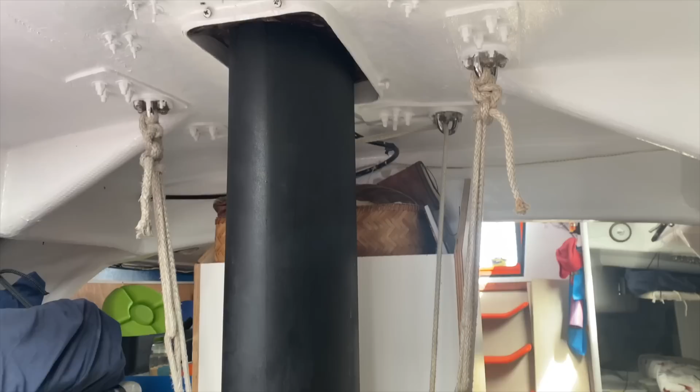Welcome back to Sailing NV, where we're turning an open 60 race boat into a fast family cruiser. In this episode, it's finally time to tune our carbon fibre mast and rig.

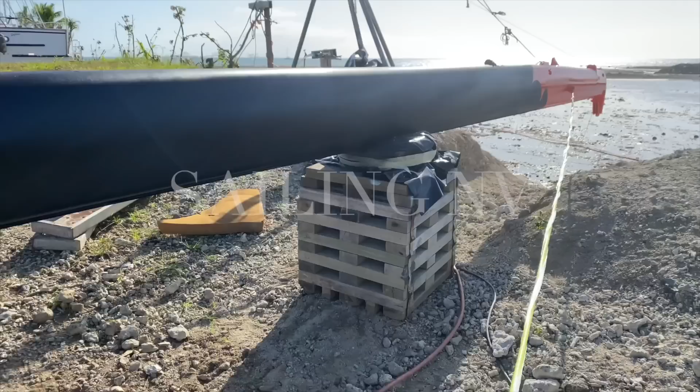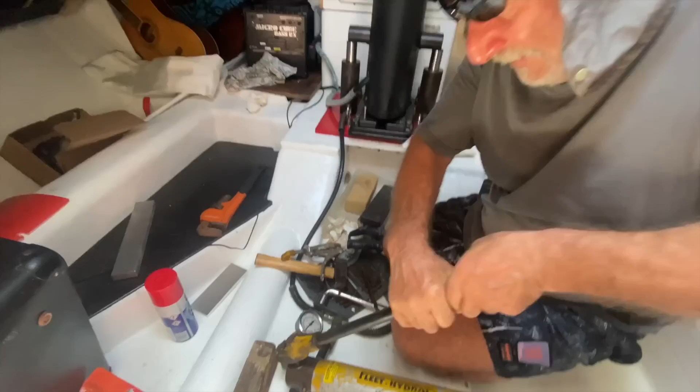Our mast is approximately 26 metres long and made of carbon fibre. It's got 3 spreaders, and the standing rigging consists of 2 cap shrouds and 3 sets of diagonals: D1, D2 and D3.

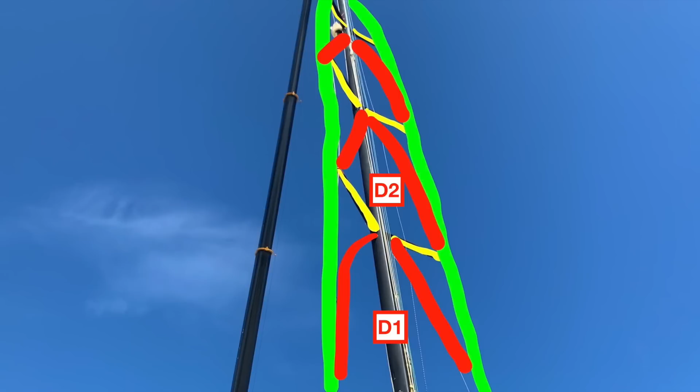Rigging on boats is usually tensioned by hand using turnbuckles, but for boats and rigging over a certain size, this becomes no longer possible, as the force needed produces so much heat that it would cause the turnbuckles to deform. So in this case, a hydraulic jack is used to tension them further.

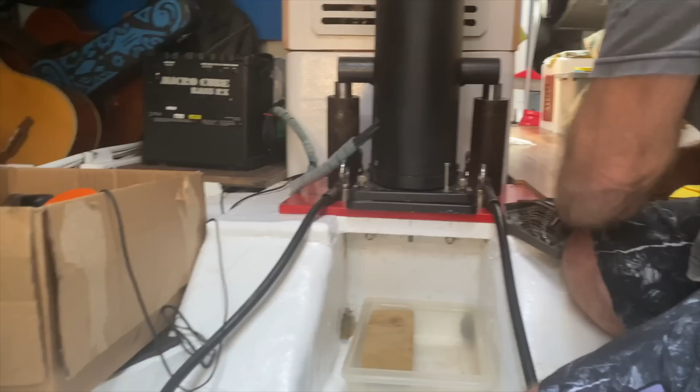Here you can see the pistons from our hydraulic jack positioned underneath a bar that goes through a hole in the bottom of the mast. The pistons of the jack push on this bar to lift up the mast so that wedges, known as shims, can be slid underneath.

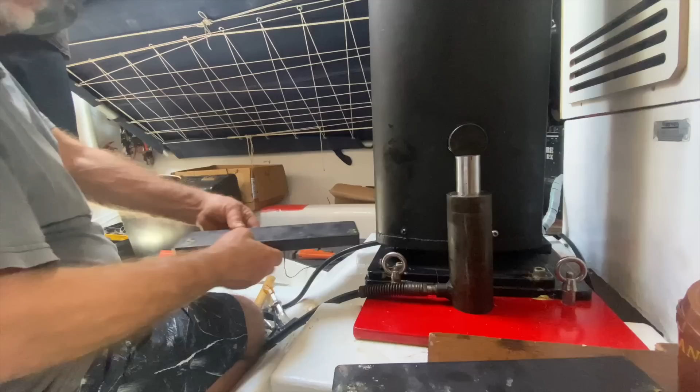So Applied Composite Technologies have been contracted by Sydney guys. We had completed the rig pretty quickly and stepped it already in Sydney on the 10th of March, so pretty much 3 months and 10 days. So 1,500 man-hours went into the rig and stepping.

I was only called once to Sydney to tune that rig, as they were heading for Hamilton Island regatta and then planning to do Hobart. That was on the 15th of July 2011, that is 11 years ago. I went to Sydney to tune it.

She carries about 17 tons of compression in a racing tune. Pete explained that in racing tune, the cap shrouds are tuned to 20% of their breaking strength, which is quite a high tune. My intention is to tune it a little bit lighter, minimum like 15%. Okay, 15%, yeah, which is good standard of industry.

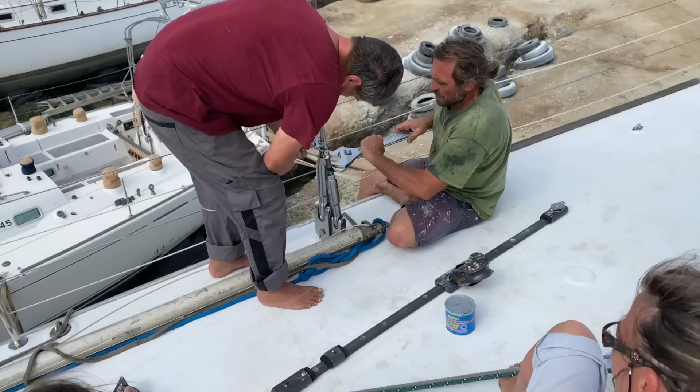When we stepped our rig, we just did the turnbuckles up by hand, as we were waiting for this moment to tune the rig properly. So the first step was to jack up the mast to fit the shims underneath and see what tension this would put the rig under.

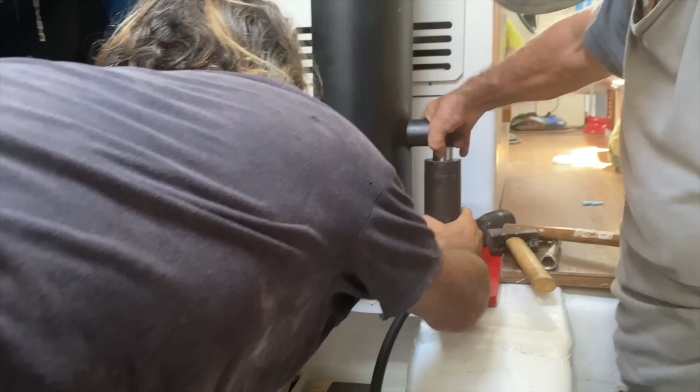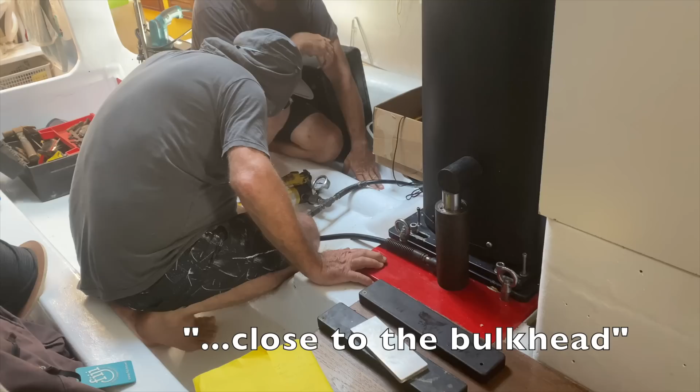Keep the air open. Yeah, here, close to the bulkhead. If you could watch the D1 and D2 lines, so they don't get stuck and damaged. Okay, see, it's going up nicely.

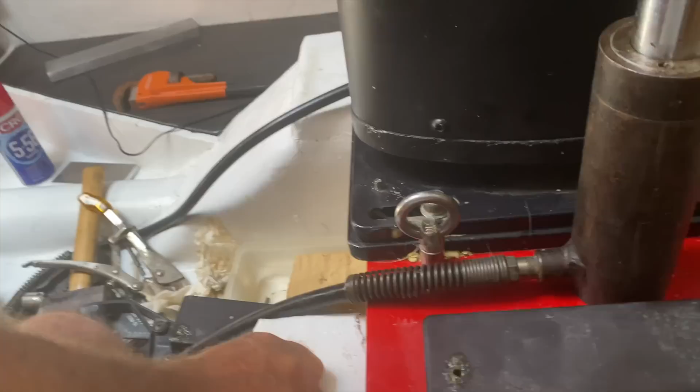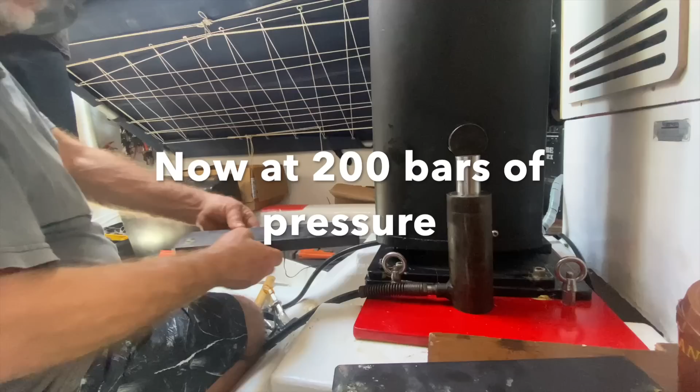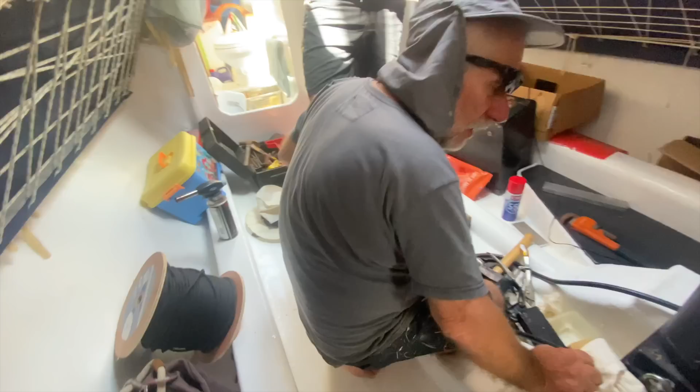Don't stand too close, come in front. Don't stay on the side of the mast, because if anything jumps, you'll be hit.

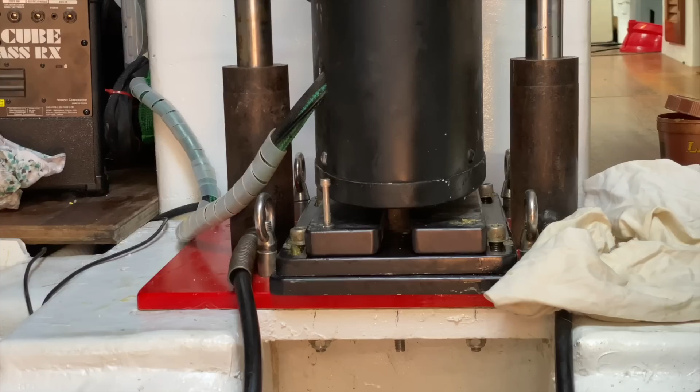240. We want to go to 260.

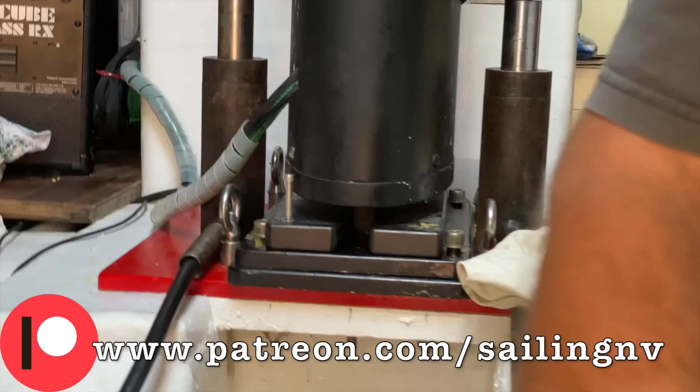Are the D1 lowers tight, or are they still loose? The D1 is still loose. Good, really loose. D2s start tightening up a little bit. Yeah, they take a little bit, but they are very loose. You can see the bend of the rod, and they shake. The D3, they look tight.

It is scary. Yeah, I'm scared. We're scared to break everything. No, we trust in you. I'm scared to be missing something.

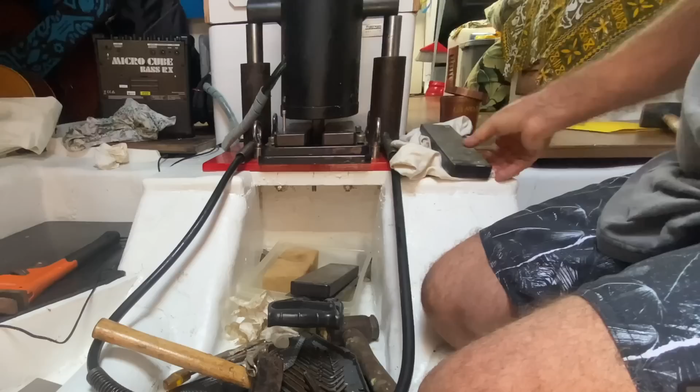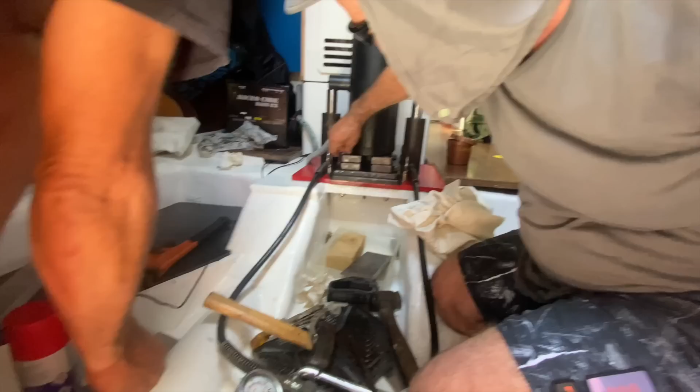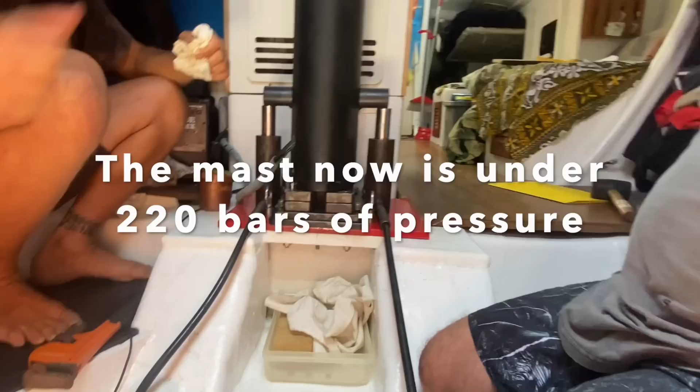To determine the pressure that the mast is under when it's sat on the blocks, we release the pressure on the jack, shaking the blocks until they're no longer loose. At that moment we know the mast is sitting on the blocks and no longer on the pistons of the jack, and that is the pressure the mast is under. 220, this is the tuning pressure at the moment, because that's where the mast sat.

I mean, it's actually a bit less because the keelson is a bit spongy, it's not 100%, a million percent firm. How could you tell? You just felt it, I was able to shake it until I reached 220, couldn't manage, and it set.

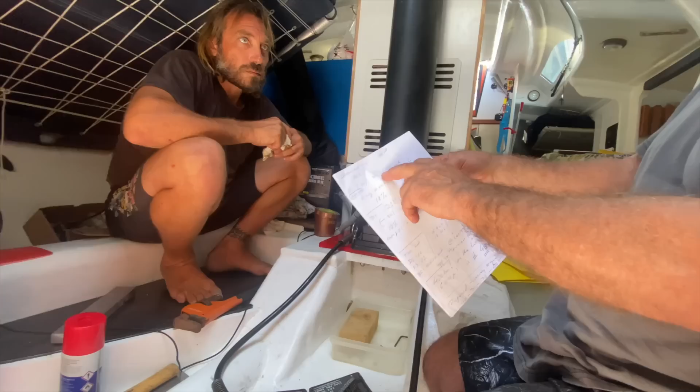Each rod breaks at 27 tons, so you've got 54.5 tons of breaking strength. As we mentioned before, in racing mode the rig on this boat was tensioned to about 20% of its breaking strength, and the minimum tension required would be about 15% of breaking strength.

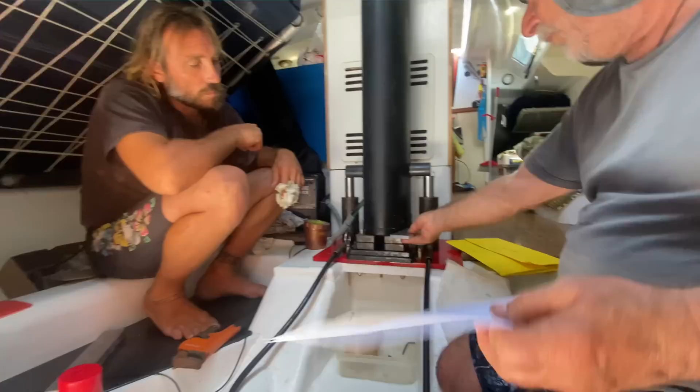Our idea is that we will add one more thinner shim when we're sailing. When this shim is in place, ideally our mast is under something like 18% of the breaking strength, and when we are docked for a longer period, we can remove this shim and the pressure would be reduced back down to something like 15%. Reducing the pressure on the rig will hopefully help prolong its life.

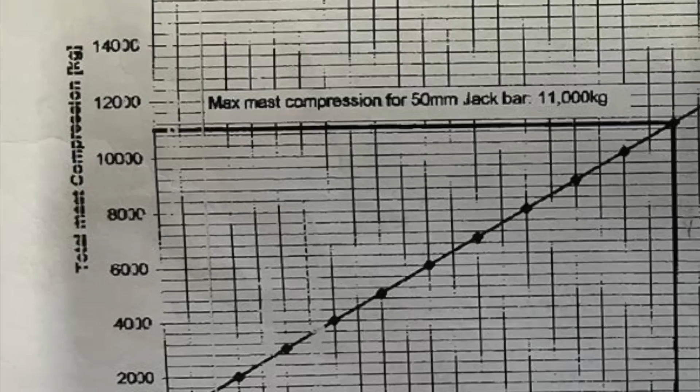At 18%, we wanted around 10 tons. That's what the designer wanted. Okay, 10 tons of pressure. So on this jack, 10 tons of pressure is achieved at 260 bars. So I was going to have 260 bars, but I only have 220. But we're going to put one more shim in, and that would likely be this 10 millimeter one.

We can, but we don't have to. If we do put that one in, you'll be able to remove it for staying dormant for months sometimes, so you can de-jack it. With the current setup of the turnbuckles, I'm guessing we might have to undo them a bit in order to put this in and have it around 260. Look, what's 220? If we're not putting this in and only had those two, it's about 9 tons.

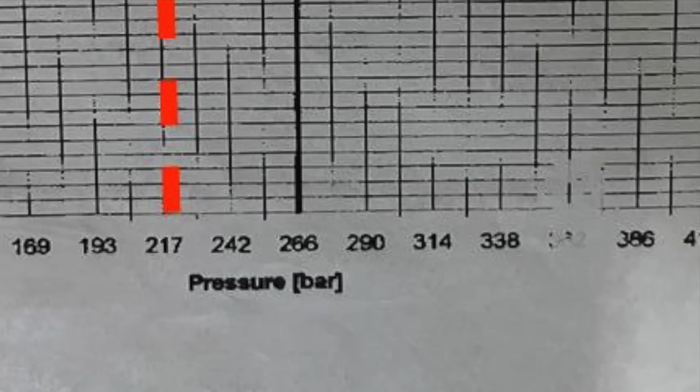As Pete was just explaining, we're already at 220 bars of pressure, which for our jack equates to about 9 tons of compression. This means the rig is already close to the high racing tune, which is 20% of the breaking strength. The diagonals were also involved in this calculation, and since they were currently slack, we had to remember that when tensioned, they'd probably add about a ton or more of pressure each.

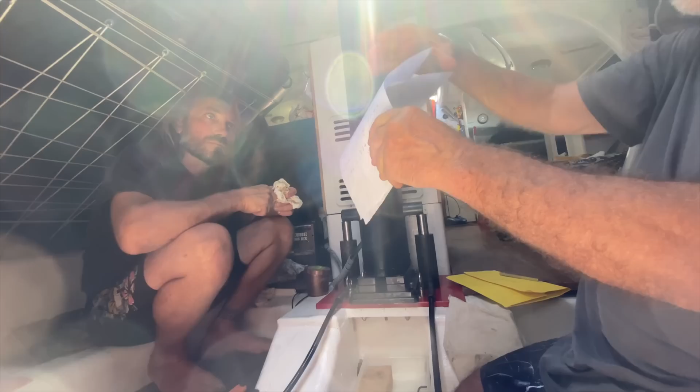D2 and D3 are relatively slack. Once we put 1 ton on them, they're going to compress 4 tons down onto the mast. And that 4 tons is going to bring the V1 cap shroud, which holds everything, up to around 25% at 260, which is high racing tune.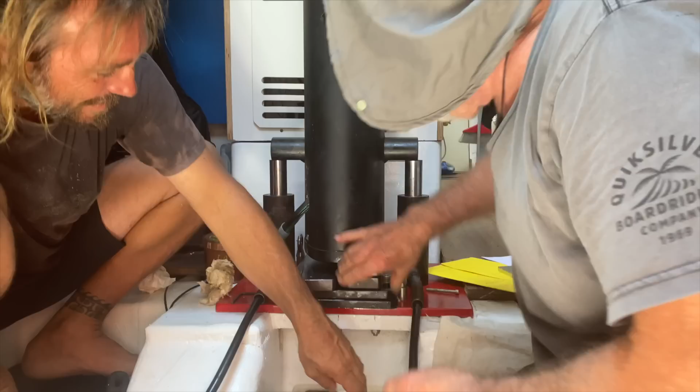And I don't want that high, yeah. So we decided to de-jack the mast and undo the turnbuckles on the cap shrouds a bit before increasing the pressure further to fit in the third shim.

We're just only dropping down now, slowly. Oh my god.

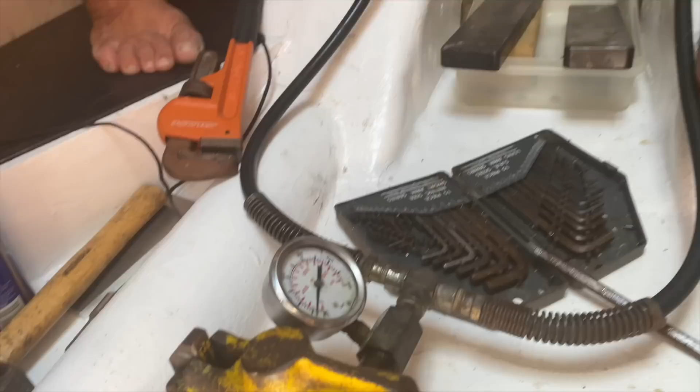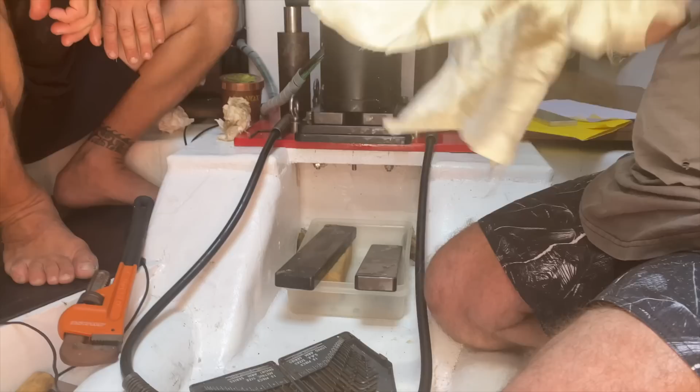It's a scary noise. The scariest part is the hydraulics—if they break, that will be dangerous. Huge pressure, 700 bars. If the line breaks, the fluid will hit you, will cut through flesh, through everything. That's what pressure is. It will cut you in half. So always make sure you've got the right kit, and be aware of the pressure. Pressure is a vicious, terrifying thing—it's like a bomb exploding. 700 bars is just huge pressure, 700 times atmospheric pressure. It could squash you. Take it seriously, because safety matters. Take good care of it.

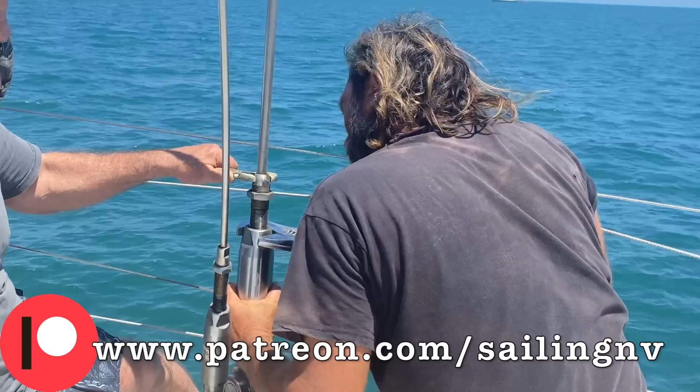So we detensioned the cap shrouds, checking carefully that we turned the port and starboard side to the same amount. With the tension on the cap shrouds now reduced, it was time to jack the mast back up and try to fit in this third shim.

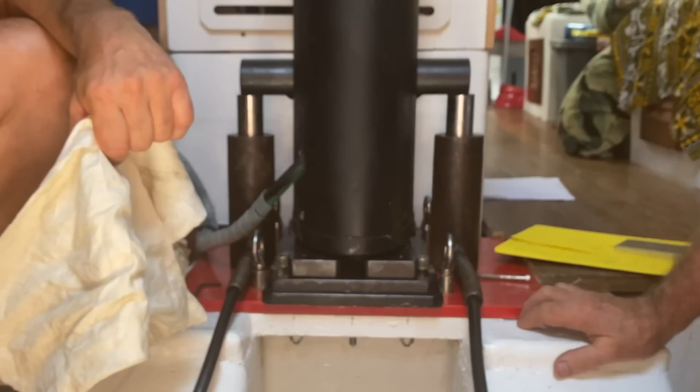Oh, it makes me very nervous. When you did the rudder, Timo, how much pressure did you get to? A lot, I reckon. Maybe 200. We used the same jack to push out our rudder and bearing from the boat.

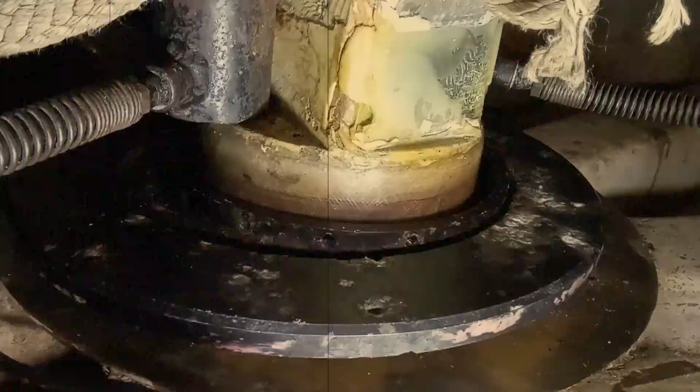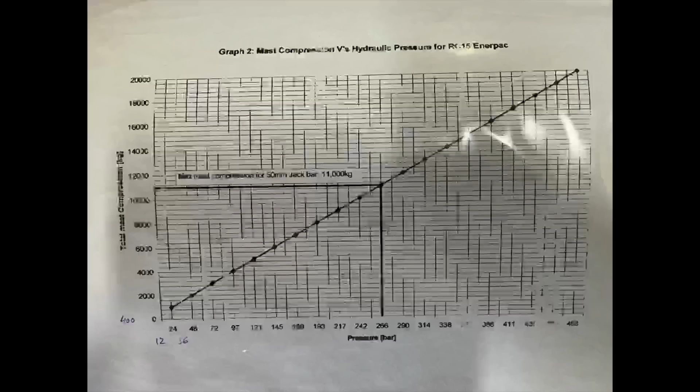But up till now, we didn't have the correct conversion from the reading on the gauge to the pressure being exerted by the pistons. Now we've got the graph for our jack. Thanks to Peter, we realised we were pushing with a lot more force than we'd originally realised.

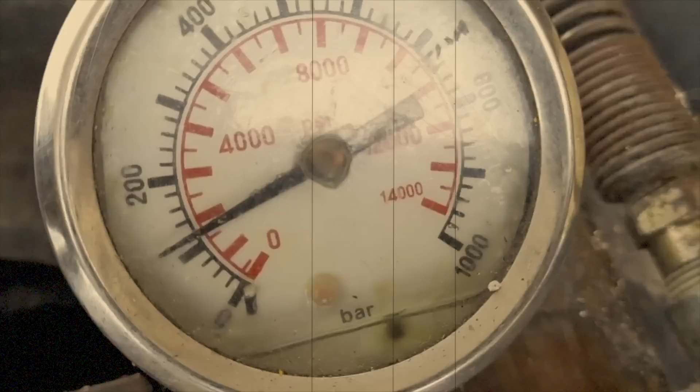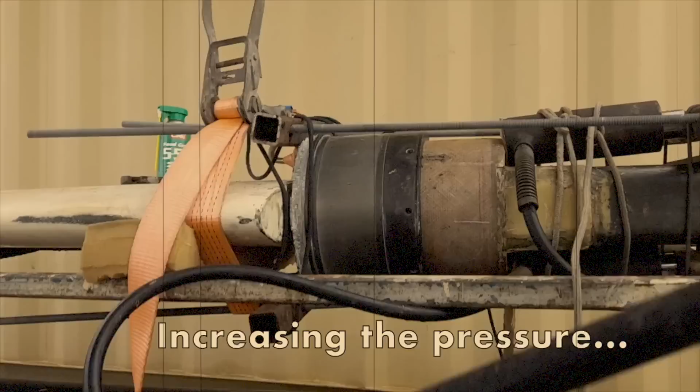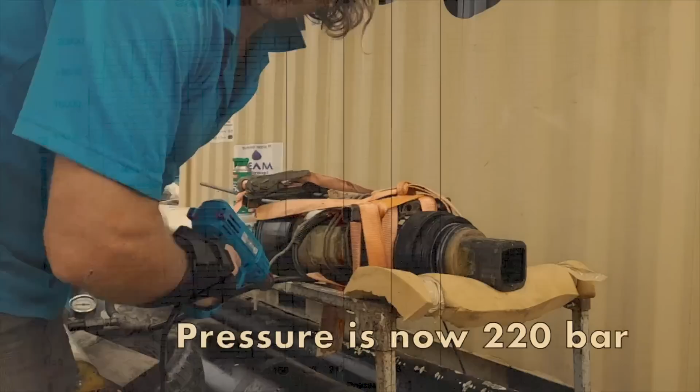120 kilos. We can now see from this graph that 120 bars is exerting 5 tons of force. So only 160—and 160 bars is almost 7 tons. 220 kilos, 9 tons.

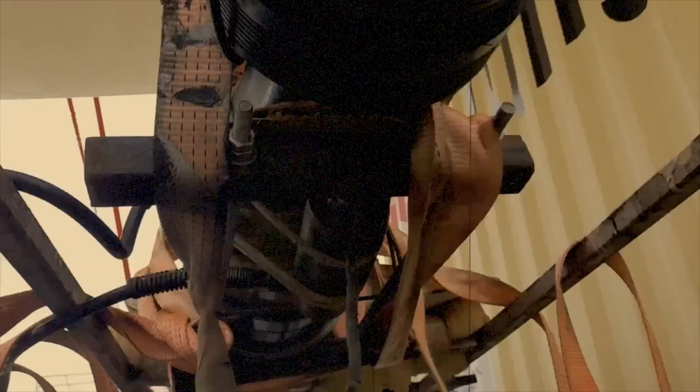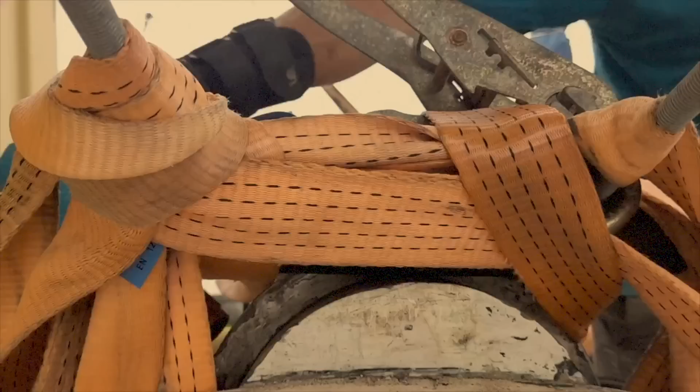Oh la Madonna, 250 kilos—10.5 tons. 300 kilos, 12.5 tons. 80 kilos, 3.5 tons.

So 60 millimeters of shims we'll have on the end for a 60 footer. It's 66 actually, so it's just right. With this, you can easily turn the turnbuckles by hand. Yeah, it's amazing—on these shims you can still easily turn turnbuckles without frying them.

If you remove one shim we can use it with the wrench, with no shim we can do it by hand, and now we don't touch it because they can get damaged if we touch them now.

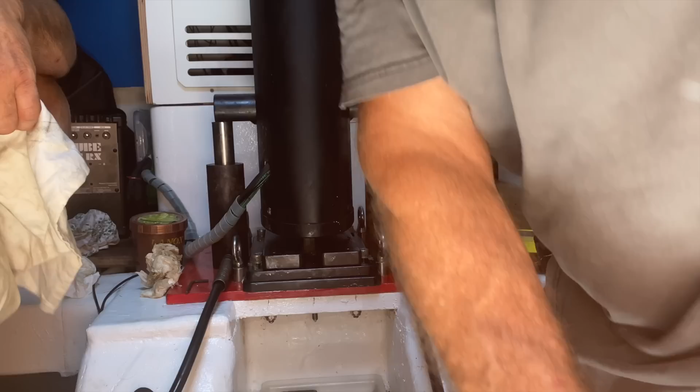Madonna santa. You don't use the helmet sometimes? If I do your job, I use the helmet.

You can put the bolts on now. Okay, I'm going for another 10 mil. Actually only 7 mil, I've got 3 already. Wait, I'm not even at 300 yet. We're already in there, so 300—not even yet. I mean on the rise, because you're not checking on the rise, we're checking on the drop.

Check the diagonal. Is it slack? Yeah. We'll send you up on top and we're going to be here.

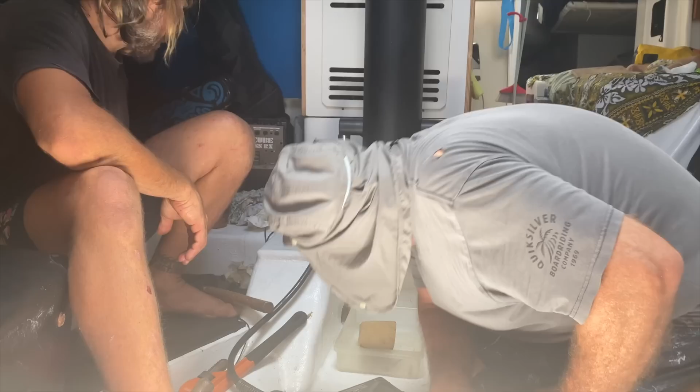Okay, put the shim in. See, we're on the end of the jack range. Yeah, a little bit more, a few pumps. We need more, we can put more. It's still going, I'm going. Another few pumps and we'll be out of range of the jacks. We're lucky, yeah, that's good. One more pump. Wait, the positioning is very difficult.

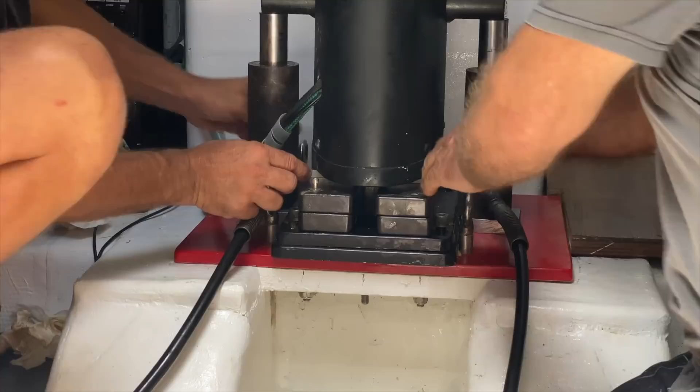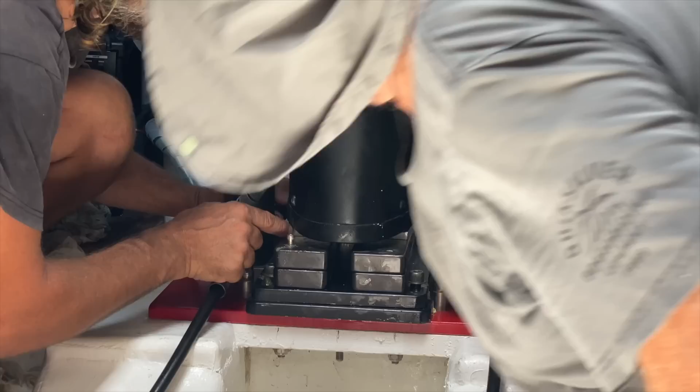It sits in the middle roughly. I have the 2 bolts here to use for alignment, but I don't want to push it inside. I don't want to put it inside, the line should be on the outside, on the edge, on the edge. Okay, like this I can control it. Let me double check.

Okay, oh god. I think I do it like this, with your fingers. Okay, go down now. You're gonna be shaking it and telling me where. You just yell when it gets firm.

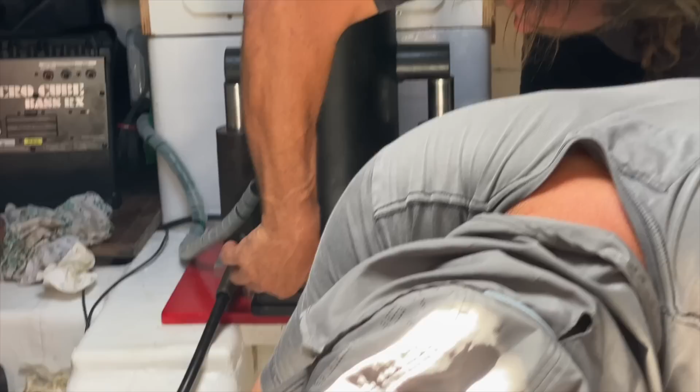Go, hang on, I'm going very slowly. Go down, down, down, down, down, down. 280, 260, 240, ready to stop? Go, 240 still, go. 240, go, 230, stop! 230, 220, 230.

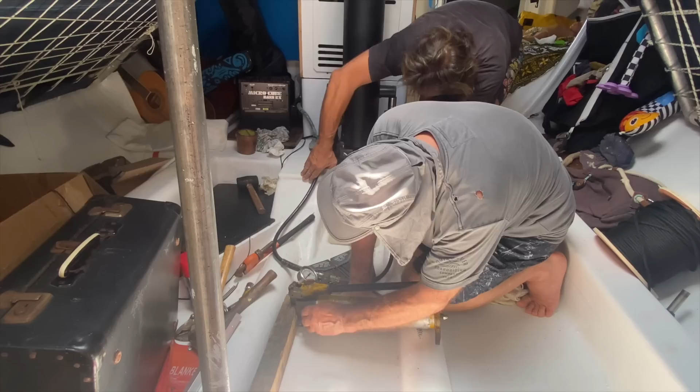That's what you wanted, yeah? Let me see. So what happens if you don't do this? You wouldn't know then, that's all. You'd just know a little bit on the line. Now the problem is it's not really sitting properly, because we're still on the jack.

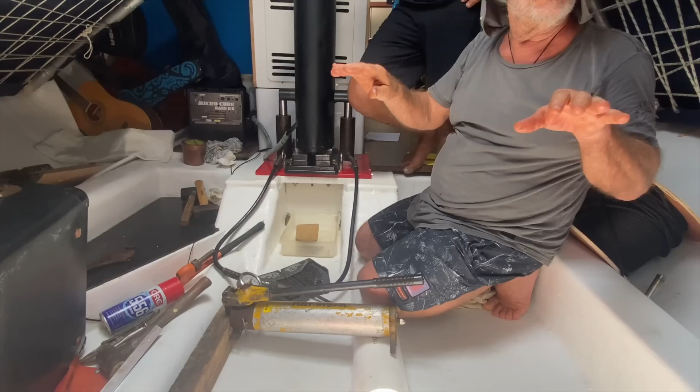So put your finger here, put it somewhere there, and look, I'm gonna keep on dumping. I'm gonna dump now, do it. I feel it, you feel it okay? So the true pressure is unknown, no one can tell you because, exactly, if the keelson was infinitely stiff, we would catch that moment. It behaves like a sponge. You don't exactly know when the mast lands on it 100%.

It's not actually just the keelson, it's the whole frame, the whole boat. If you go outside and watch the light on the hull, you can see it. Also the deck, I can move it like this or like this. But it's meant to flex a little bit, everything is flexible. Even this rod, subjected to 10 tons or 5 tons on each side, probably grows by about 3 millimeters in length.

Because it's all about the elasticity of materials. Carbon is the stiffest, steel is very stiff too, but some other materials are not.

230 is precisely 8 tons 600 kilos, let's write it down. 8,600 kilograms, which is 4,300 each. Broomstick had 10 tons. Okay, so 5 tons on each side.

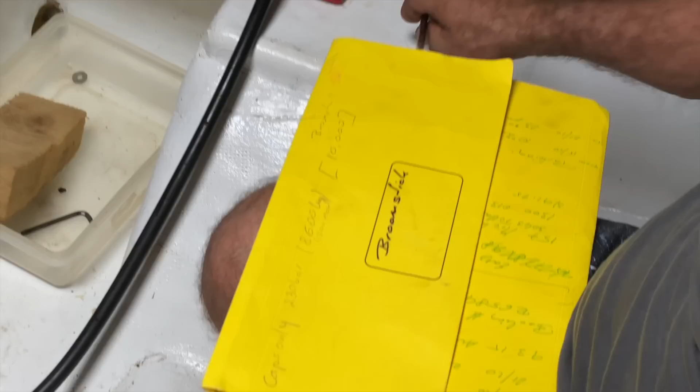20%, yes, that's what it is. So if you wanna know what percentage of breaking strength that is, you might remember from before we said each side of the rig has a breaking strength of 27.2 tons. Since we just recorded a tension of 4.3 tons on each side, this means we're currently at almost 16% of the breaking strength.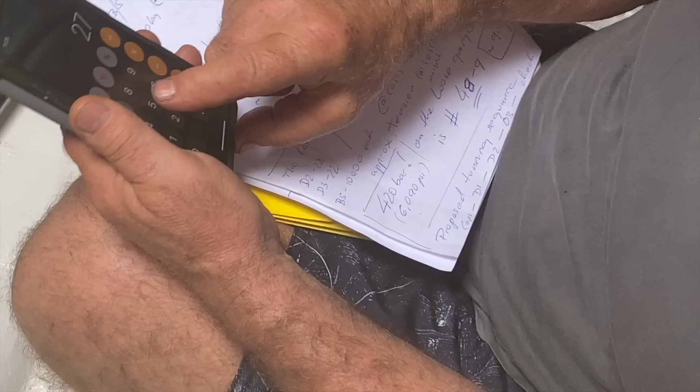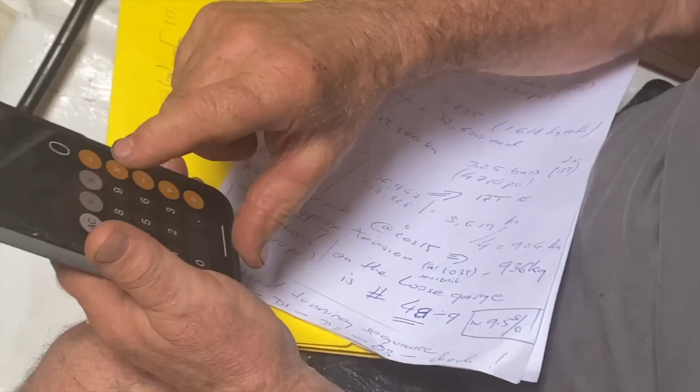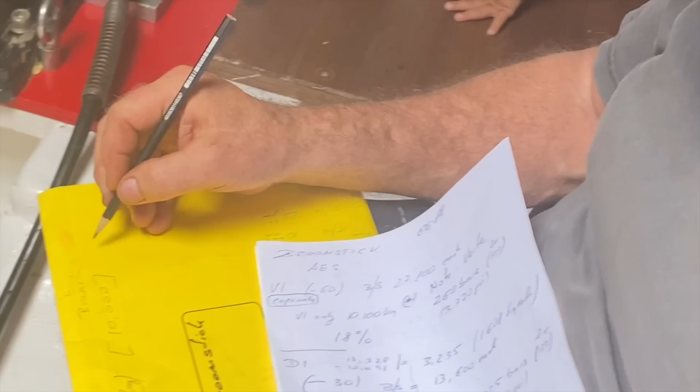27,200 kilo breaking strength of each of these rods, and we subjected this to 4.3, so 4,300 divided by 27,200, we get 15%, almost 16% of breaking strength. So that's 15.8, let's say 16. So 16% of the breaking strength of the rod, and that's what I said: 15% is a good, solid, recommended figure for long life.

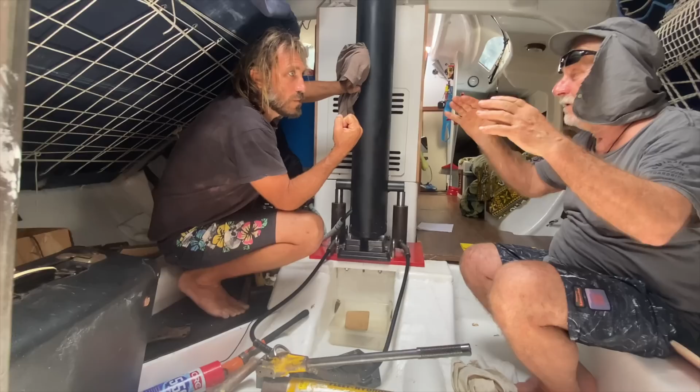Next, it was time to think about the diagonals. Stay tuned to see how we go about measuring the tension on these, and what the total tension on our rig is at the end.

So 20, yeah, we're looking for 45.

Solo, coming up with me. Where's your arm? We're gonna go work on the mast. You ready, beautiful dog? You're not looking very ready, Solo. You ready?